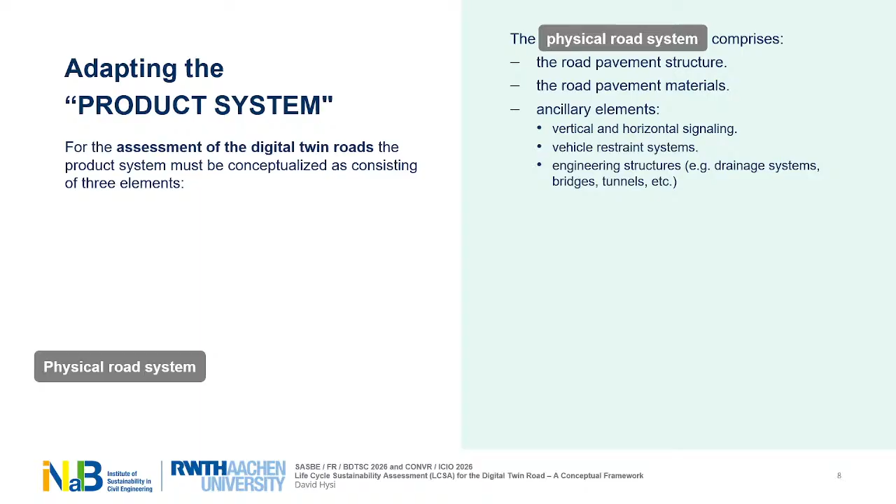So how can we further develop life cycle sustainability assessment frameworks to capture the digital twin roads? First is to adapt the product system by conceptualizing and expanding it to consider three elements. The first element is the physical road system, which is the normal assessment that we currently do. It covers, for example, the road pavement structure, the pavement materials, and the ancillary elements of the road structure.

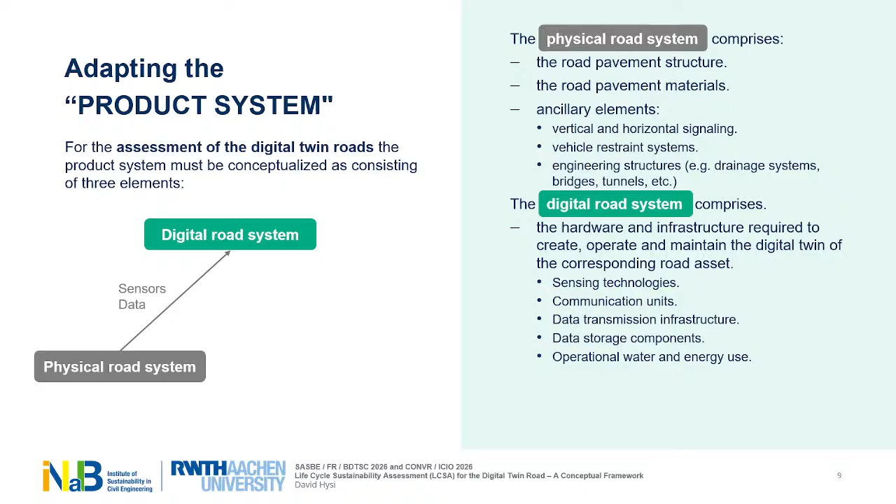The second one is the digital road system, which comprises all the hardware and infrastructure required to create, operate, and maintain the digital twin of the corresponding system, and the operational feedback mechanisms, which are the elements that enable data-driven interventions. So sensor data flows from the physical road system to the digital road system to create predictive insights that feed the feedback mechanism, which can then trigger potential interventions to the physical road system.

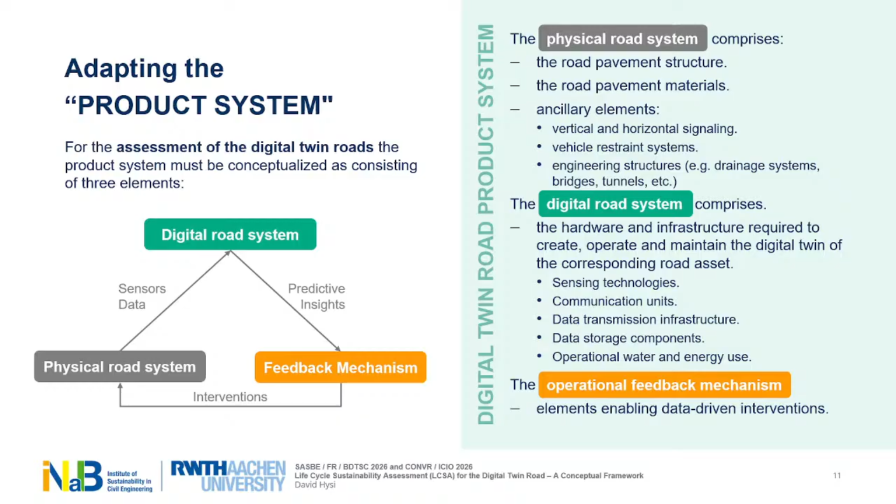The second is the functional unit. For those less familiar with it, the functional unit is the quantified function of the product system to which all the inputs and outputs are related. The introduction of the digital twin does not create a different functional unit, but it needs to be expanded. Normally, we define a functional unit by defining the road type, geometric characteristics, expected load, traffic, performance requirements, and the service life.

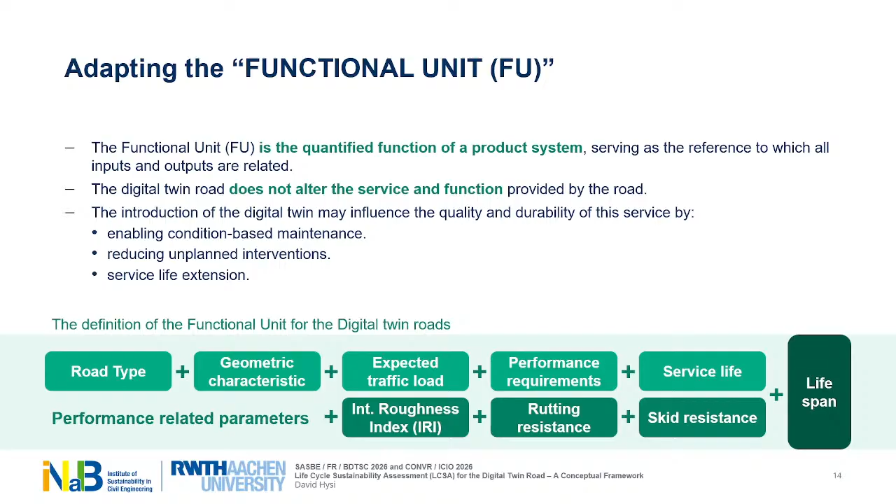With the inclusion of the digital twin, there are also other performance-related parameters that we need to consider, such as, for example, the International Roughness Index, rutting resistance, and skid resistance, and not to forget also the lifespan that is added through the digital twin, which can enable condition-based maintenance, can reduce unplanned interventions, and can thus extend the lifespan.

The second is the system boundary. What shows up in the system boundary with the inclusion of the digital twins is that the modules B6 and B7, which are about operational water and energy use, become mandatory because we have a lot of digital components that need to be operational throughout the lifespan of the road. So we need to consider also the impacts that arise from these phases.

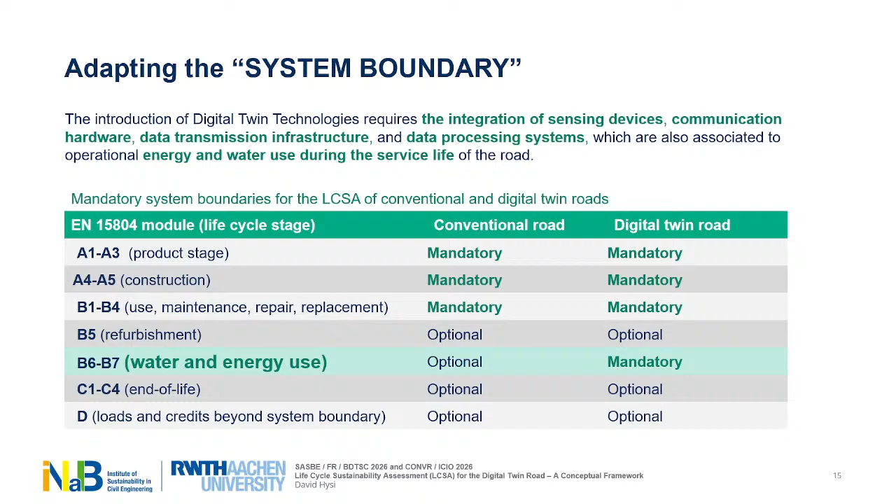Going back to the life cycle assessment, what stands out apart from the normal impact categories that we need to consider, that are impacts arising usually from material production, is also the impacts that can arise from the electrical grids, especially in systems or countries where there's a large share of fossil-based generation, such as currently Germany. Then we have additional impact categories that we need to consider in the overall LCA assessment.

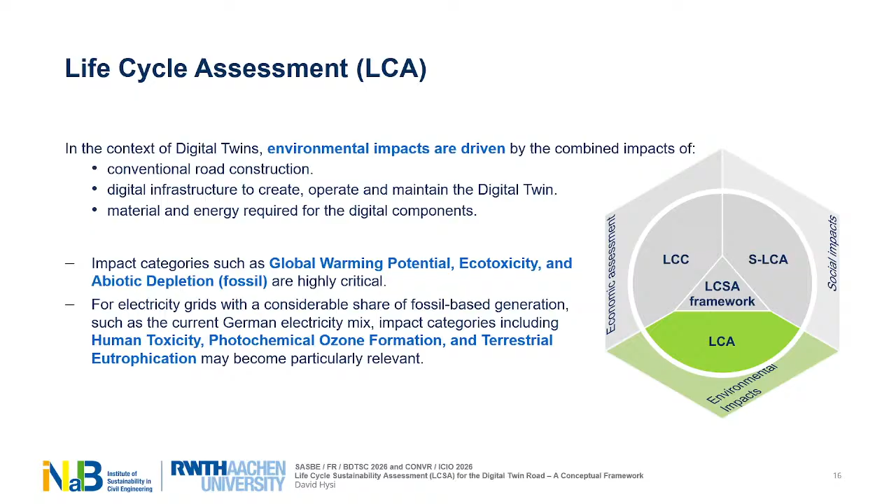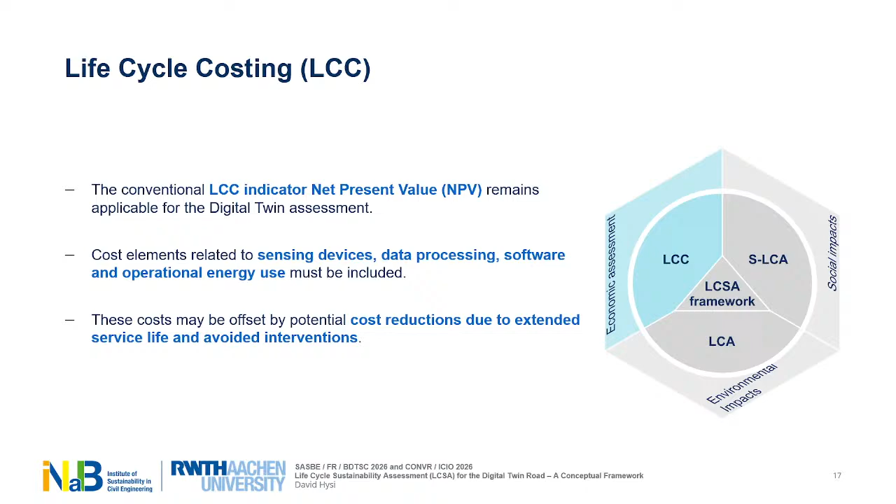When it comes to life cycle costing, net present value still remains applicable for the digital twin. However, we need to consider also the cost from sensing devices, data processing, software, and operational energy use throughout the life cycle of the infrastructure. Now, this cost may be offset because we can reduce operational costs throughout the life cycle of the structure. However, this needs to be quantified in further research.

On the social aspect, we can identify relevant social issues by conducting a social risk assessment that can reflect geographical and sectoral conditions. From our work, material production was where most of the social impacts were coming from, but the introduction of the digital twin also introduces new social considerations, such as, for example, social acceptance, which emerges as an important topic that needs to be discussed because it affects how people approach and how this technology develops.

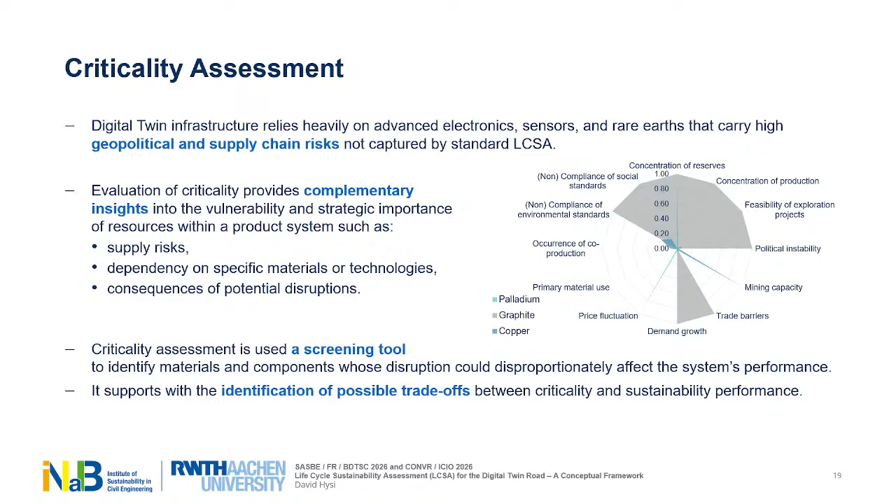The difficulty here is the lack of primary data. To do an actual social impact assessment, there's the need for primary data regarding the infrastructure. When it comes to the criticality assessment, it is quite a useful tool to be used as screening because it can identify materials and components whose disruption could disproportionately affect the system's performance. And with that, we can use it to find possible trade-offs between criticality and sustainability performance.

So to conclude, the introduction of the digital twin does not alter the product system. However, digital components directly influence the operation and maintenance phase. Future road sustainability performance will account for the physical assets, the impacts of digital infrastructure, and the operational feedback mechanisms. The functional unit does not change, but it needs to be expanded to account also for the different elements that are part of the digital twin.

The operational energy and water use are essential and they need to be accounted for. And prioritization of impact categories reflects both continuity and also change from the conventional roads. So criticality assessment still needs to be complementary, but it addresses risks that are not fully captured by life cycle sustainability assessment indicators. And if there's a take-home message, it's that digital twins require further development of the LCSA framework to extend established parameters and capture the full characteristics of the cyber-physical system.

So this work is going to proceed in the second phase of the SFB and sub-project C02, where we're going to expand the framework to account for future environmental, social, and economic impacts.